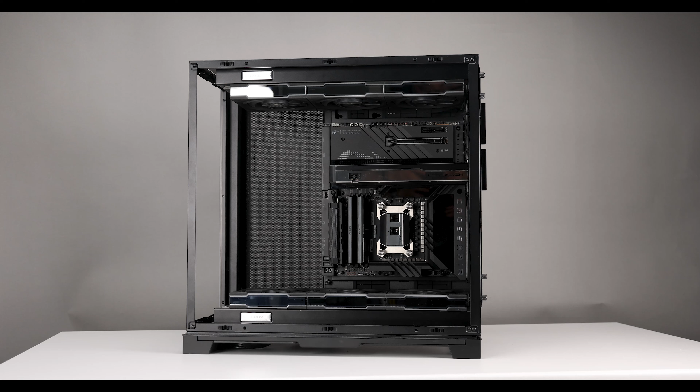Hey everyone, this video is going to be the beginning of this particular build. Instead of showing an end reveal like I normally do, I'm going to do something a little different for this one. I'll break it into parts so we can see it come together.

For those that don't realize, this is a Lian Li Evo XL. That's one of the reasons I chose to do this video with this case, because it's very popular. So we'll go into part selection and some of the constraints I have for this build.

Okay, so first off, this is an AM5 platform. This is the X670E Extreme. I picked this board for this build because I'm going to be upgrading to the 9000 series in about a week or two. I don't know if I'll have the X870E boards in the Extreme format, I don't know when that's coming, I don't even know if it's coming, but I assume it is. So I'm going to use the X670E one in the meantime, and I'm pretty sure it'll be perfectly serviceable anyway.

With that said, I have it in the inverted position, or some people like to say upside down. Outside of that, I have a 4090 Strix on a Heatkiller block, and I've already pre-installed a Heatkiller 420 on top and a Heatkiller 420 on the bottom. I'm using the Lian Li TL LCD fans for the bottom and the regular TL for the top.

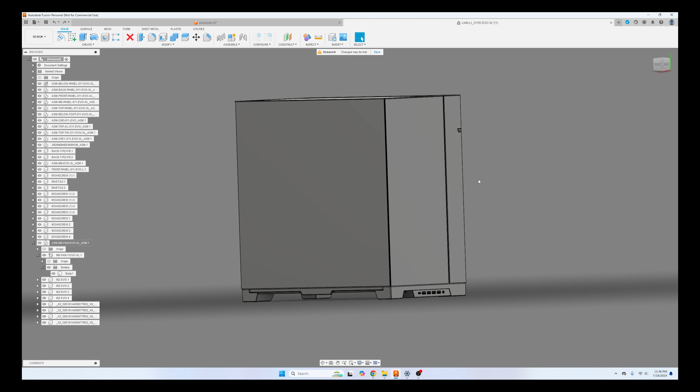Alright guys, so we're on the computer. I have the CAD file for the Evo XL open. This is actually public - you can grab it from the Lian Li Evo website. They have it for some cases, not all. You'll see it in STP format, or sometimes it might be something else.

But it's kind of cool that they offer this without you having to ask for it. Most companies are not going to give it to you unless you're a partner of some kind, or you want to make accessories or something like that. So it's cool that they put it out there. As a consumer, you're not exactly going to be able to produce it on your own anyway. And the factories that make these cases often let these designs go, and that's why you'll see sometimes multiple brands making the same case. It's not because they're rebadging a case - the factory's kind of like, hey, we're making this, do you want to make one too? Whatever, I don't want to go too much into it.

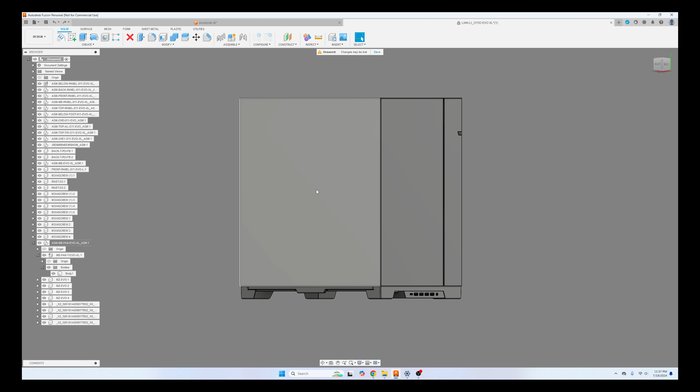So here, I pretty much know I'm looking for this bracket assembly. I mean, you can move all this stuff around. For those that don't know, Fusion is a free program, unless you want to use it for commercial purposes, then you should buy a license. But I just have the free version open up here, and I'm focusing on this bracket because what I was telling you guys earlier is that I'm going to mount my reservoir on this bracket.

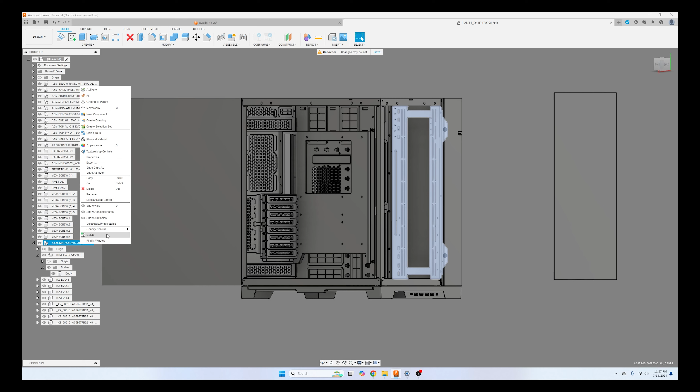So what I'll do is I'll isolate this bracket, and you can see that because I have the CAD, I can easily design something here. I know where all the holes are, and that's essentially what I have over here. So you can just export this bracket into another file and then open it.

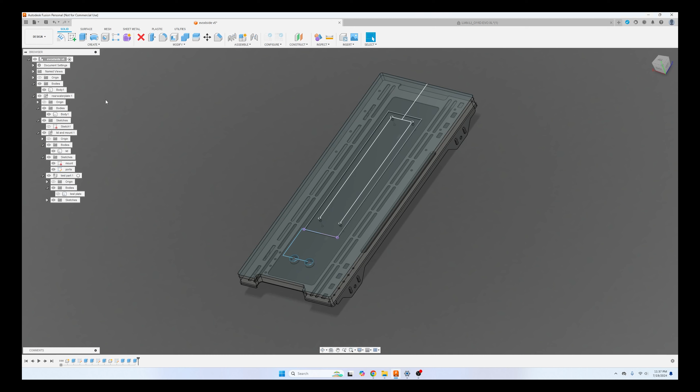So this is the bracket itself. So I've taken the measurements from the bracket and projected it up. You can watch some Fusion guys online. I'm not a professional at this, but I know it well enough to do what I need to do.

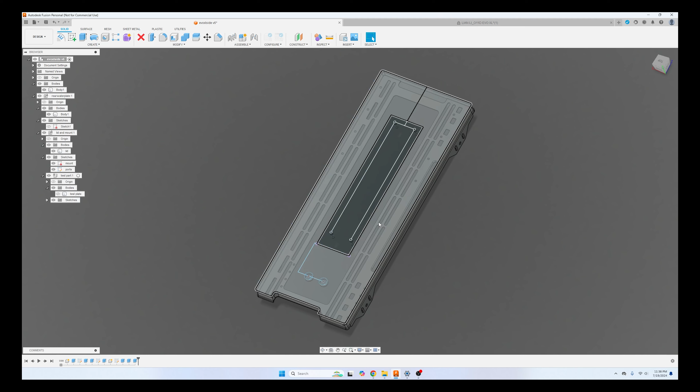So right away, I made a sketch where this is kind of the outline of the Heatkiller reservoir. This is the entire width of it, 70 millimeters. This inside are the mounting holes for the reservoir, which is why there's going to be a hole there.

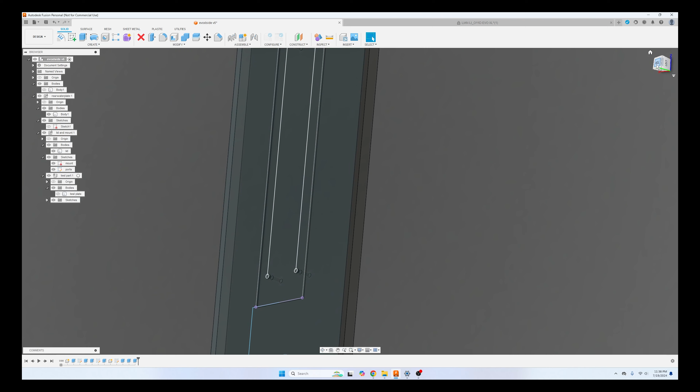So if I hide all this, I'll show you guys this basic sketch, and I put on my test plate. Now that we're looking at the plate, my test plate, I cut these holes myself. I measured them, where their locations would be, and my plan is to mount the Heatkiller reservoir here, and then these ports are going to match the in and out that's on the res itself.

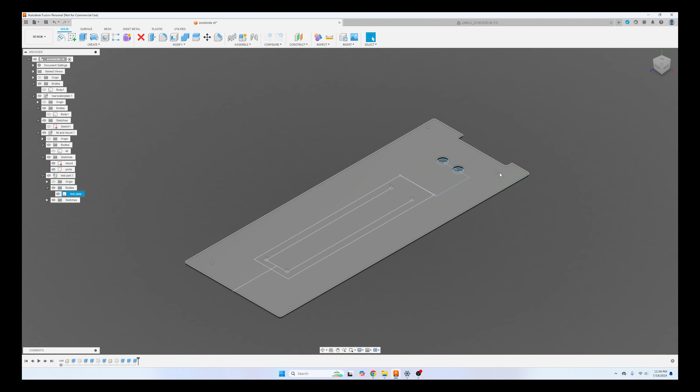I've already cut this out so I can show you guys what I mean. I've chosen these temporary mounting locations for screws to mount to the original plate, to the original body plate. I could use the 360s here and the 420s, but unfortunately I'm going to have some tube runs right here, water channels on this side and this side, so I can't put a screw there.

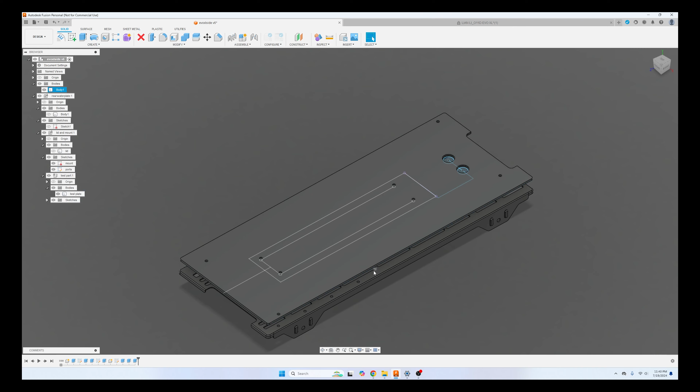I put them on the extreme ends. You're not going to see them from the front because if I put back - sorry guys - this is the bottom of the distro plate, and this is the lid of the distro plate. So the screws will come through from here. You'll see that, it's an example here.

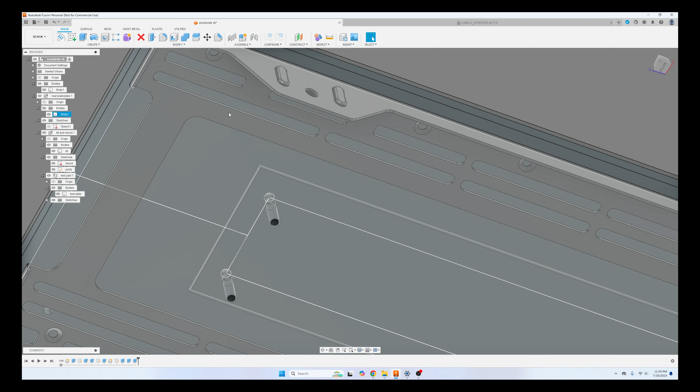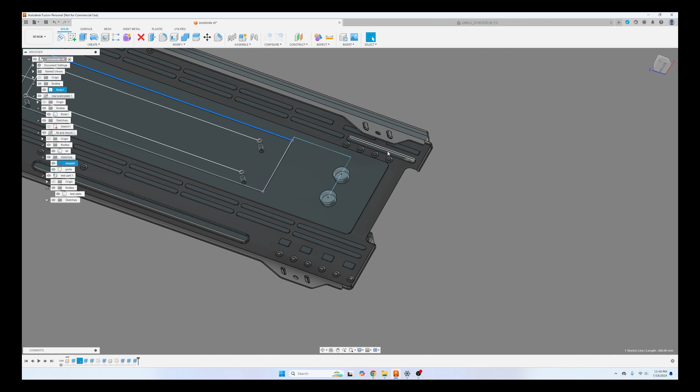Sorry guys, really struggling without my space mouse. It's like from here, for example, I'll put a mounting screw here and make a thread on the rear of the acrylic plate, and that will be a good place to mount the screw. Same goes for here. Well, that's too low, maybe like here. I have a screw here already, so stuff like that. So that will make it mount, and you won't see any of the screws because this will come in.

So what I'll do now is I'll show you guys the plate, I've already cut it out. For those not aware, Fusion is also a CAM software. I know I'm going off on a tangent here, but if I go to manufacture, you can see I've already made the tool paths for this cover plate, and I've cut that out on my CNC.

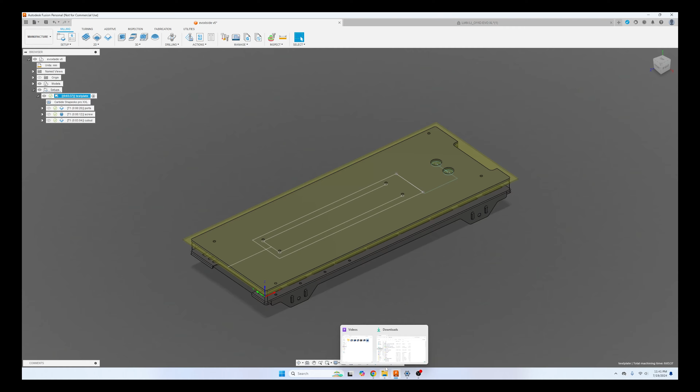So we'll go back to the PC now, and we'll mount it in place, and you can get a better idea what I'm trying to do here. All right, so you can see here I've cut out that plate I was talking about.

This is 3mm acrylic. Obviously, I do not suggest you mount a reservoir on 3mm acrylic. Even though this is backed into that metal piece, I would still not suggest it because it will crack over time, especially when moving it around. It's just not good enough. If you want to use 3mm, use 3mm aluminum.

But anyway, the point being is my Heatkiller reservoir, sorry, pump res, is here now. And what I was trying to tell you guys from the beginning was that this is obviously not the right length, but I plan to, for example, run one here, run one here, and then for the GPU you can see I'm going to do something like that, and then something like that. Obviously, I'm going to have all 4 ports be at the same height, so it's a symmetrical look, right?

So for this portion, the CPU, I'm going to have both of them come out, hit something around here that will then connect these two ports. So that's pretty much the plan. What I'll do now is map out the ports here.

I'll show you guys how I do that, and then I'm going to map out the ports in the front. I think that's really just finding the X here, because the Y is variable. Sorry, no, the Y is not variable, the X is variable. So let's look into this part and get started.

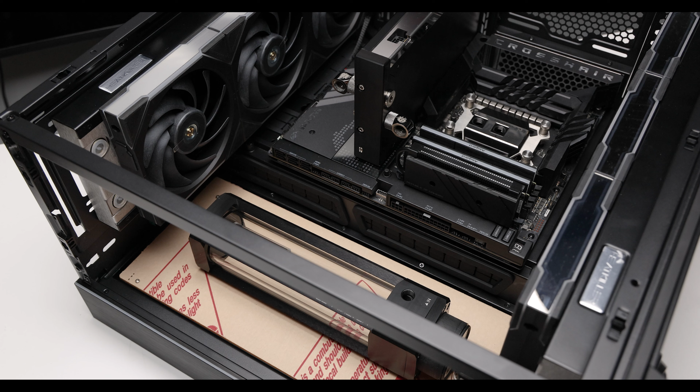Sometimes I like to use metal tubing for this because the 90 is always perfect. So if I use a combination of fittings and tubes to mark this point, that 90 is always going to be perfect, so when I bend the perfect 90, it's going to fit. Or sometimes what I'll do is I even just build the whole fitting bridge. Obviously not everybody has fittings laying around, but I happen to have that.

The plan here, to clarify from before, is that this out, right here on the reservoir, is going to go into this radiator. So there will be a run here. Obviously this is going to be adjustable, this can be lower down, can be higher up.

So when I'm measuring this, I'm only going to have to figure out X for the radiators, the Y can be varying. For the GPU, I can figure out the Y, and the X can be varying, because I can move it a little bit over. Ideally I'm going to make sure these tubes are equidistant from the reservoir, so that way it's symmetrical.

But that aside, we're going to go out into this reservoir here. This reservoir is going to connect with a different block distro thing to this GPU mount, to the CPU. So there will be another thing floating over here, which will be the connection to this. This will come back out, go into the...

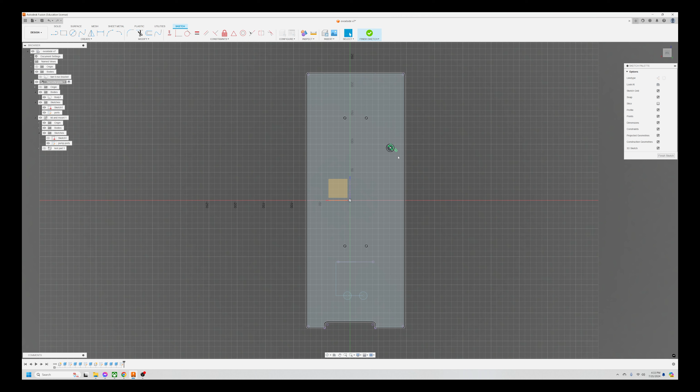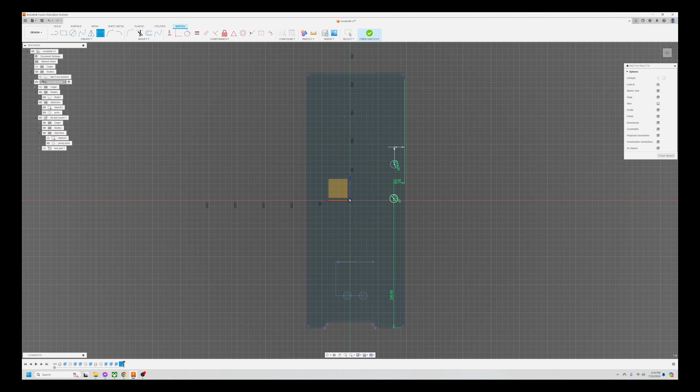Starting off from this perspective, I'm going to draw just one 14mm hole, and we'll say it is, according to my initial measurements, 19mm off to the side, and 230mm from the bottom. And the next hole is going to be 14mm also, 19mm... actually, you know what, let's zoom in here and make this 16.

I should keep it 14. Obviously people do that slightly differently, you don't do it the same way I do. So this distance is 71mm. This is the GPU, right?

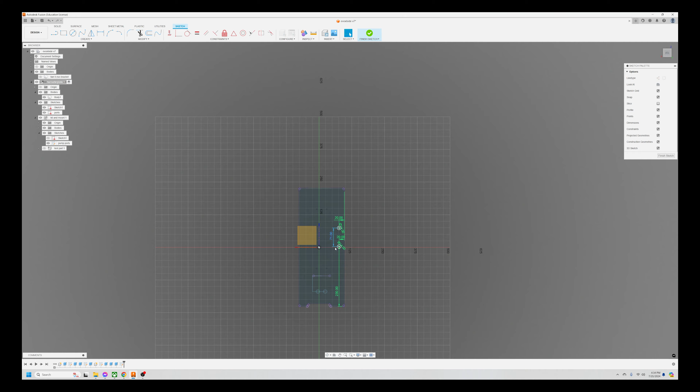Like I said before, I can move the X in, the X out more. So what I'm going to do is make it 20mm, because on the other side I think I'm 20mm out. So I'll make this 20mm from the side. And then these are the two GPUs, and we'll come here and do a radiator.

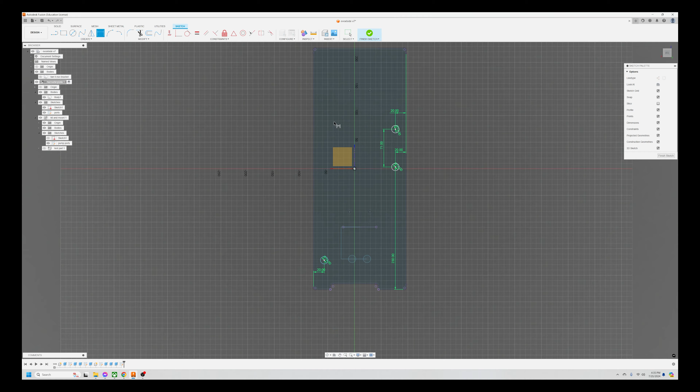I'm obviously going to move this wherever I need it to go. But initially, let's just draw a hole here. We'll do 20mm from this side. And then for Y, we can put it wherever we want. Let's do a measure.

This is how far? This is 230, right? So we'll move this 230. Come in here, so we'll also say that this is 230.

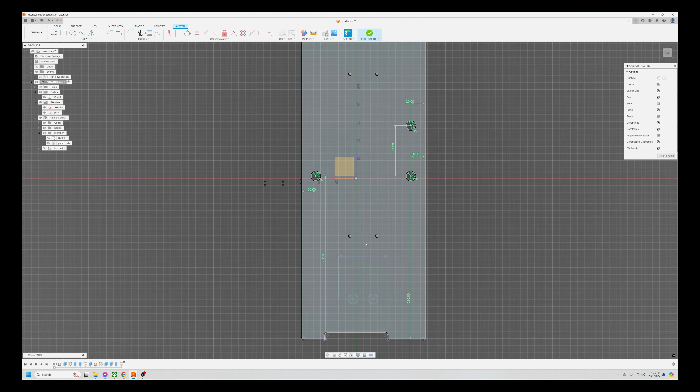So now you'll see I don't have a model of the reservoir, but the reservoir is going to go here. It's 70mm, this is the amount. I think I have that over here, right? Let me project that into here if I can. So this is a 70mm line, and then we'll do another 70. Yeah, that's 70mm. So that's the res.

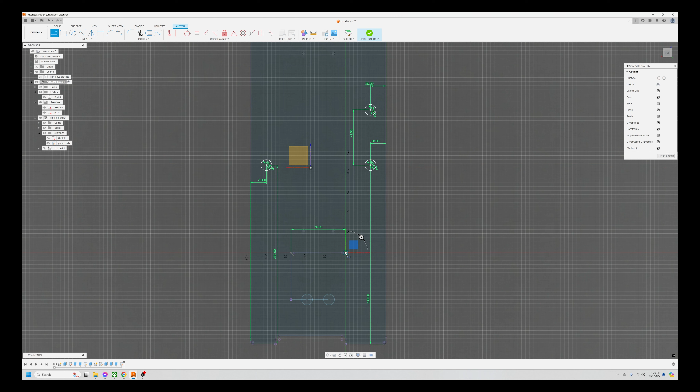So if I look at it - like I said guys, everyone has a different process, mine is not exactly the only way to do it. I just want to see here. We have from the width of the res, what is that going to be?

Why is that bugging out so much? Because it went to the other. Hold on, let me see here. That's strange, it's been a while. Let's see, what's the distance between? Why won't it let me measure the distance? Oh, because that's not a line.

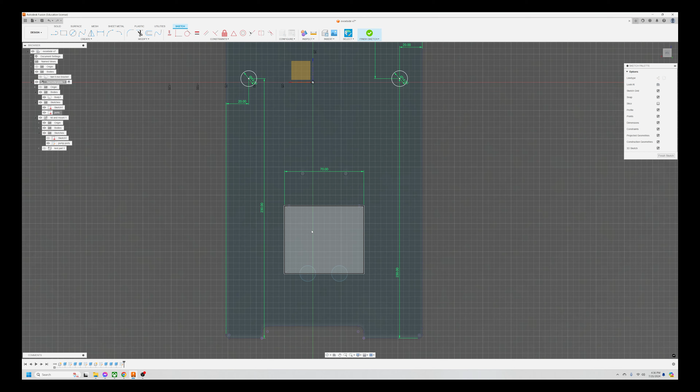Duh. Alright, so let's draw a line down. Just want to see here, what's the distance between this edges? So it's 32, approximately 32. We'll draw another line, and that's 31. So I guess we can move this over 20.5, right?

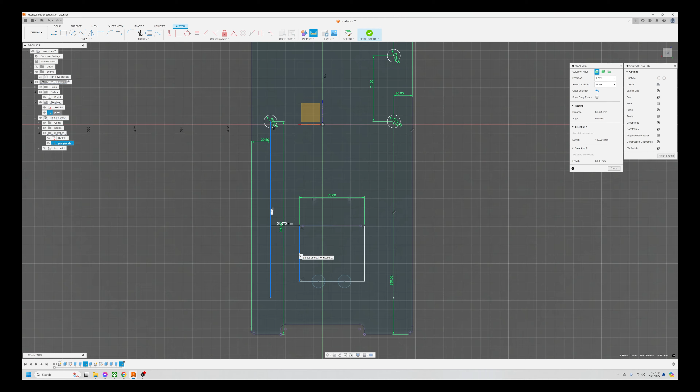And then we have 30, 31, we can move it over. You know what, let's just make it 21.5. And then we'll come down here, take another look. It's 36.92 - yeah, you can see I can get very OCD about this. No, that's 31, 30.2. Alright, so let's just make it 21.

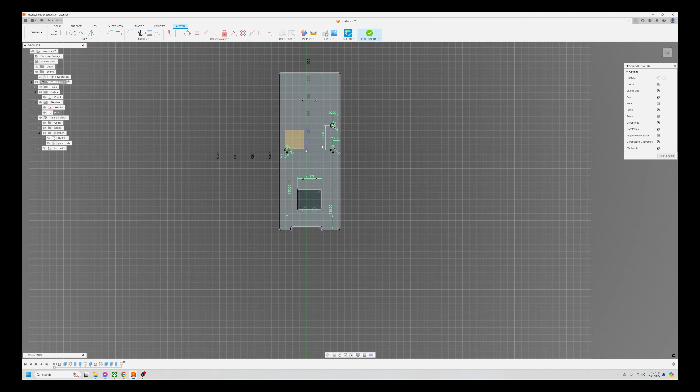To the naked eye, it's going to look about the same. So essentially this port here and this port here, when I have the whole reservoir in, it's going to be exactly the same - it's going to look the same distance away.

And then I'll just copy this onto this side. Because I can adjust the radiators, I can make these ports however I want them. I don't need to really worry about that, because I can slide the radiator left or right on the case, and up-down is just the length of the tube.

So that's simple enough. Now you can see I have 2 runs coming here, 2 runs coming here, and 2 runs down here. So now what I'm going to do is work out how I'm going to run this one to here. And in my mind, I'm running this to - okay, I have to remember the loop order in my head.

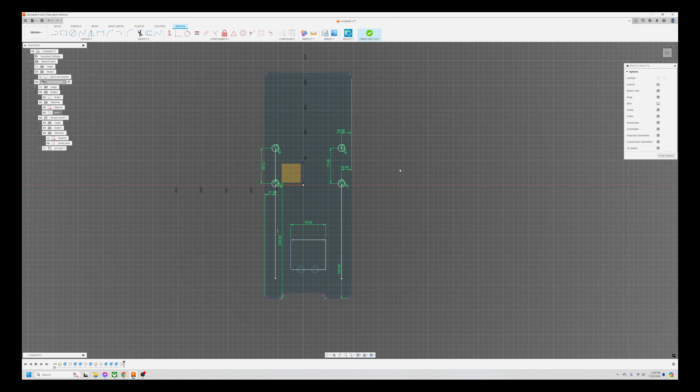But let me just create the channels for a second. Let me think about this real quick. I have to go look at the case again, because I kind of forgot what I was doing. So I was continuing this from yesterday. Okay, so new sketch - let me label it so I know what it is later.

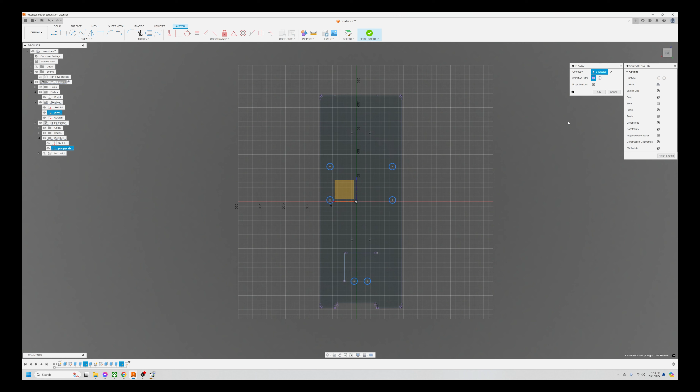I'll just project the ports up. This is simply referring to a previous underlying drawing. I'm not, like I said before, the best person in Fusion, so I don't want to make a guide. So let's just do a simple run of a 90 for now. We can always adjust this later.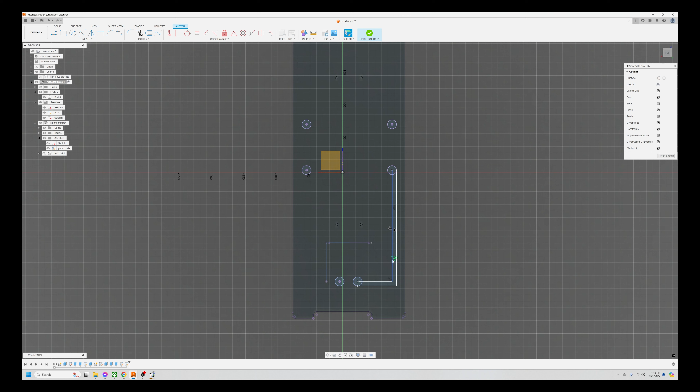So this port's coming here. Let me delete that. So, offset. Alright, I will add the curve to this later. And then let's see, this one has to go...

Obviously this one has to go here. We can almost mirror that. I'm betting I can mirror this. That's hard, do it the hard way. So I'm thinking I could just mirror this side, but then I realize it's a little bit off.

So we will just remove this. Offset. And I just want to see how far off I am from the edge.

14 millimeters, that's enough. So what I'm calculating right now is how far this screw is going to be. I'm going to have 2 millimeters of blank space, and then 2 millimeters for the O-ring, so that's 4 millimeters. Then the screws will come in at about another 5 millimeters, so I'm looking at 9 millimeters. I still have 5 millimeters to the edge from where the center of my screw is going to be. That's essentially what that is looking at.

And this will just come all the way around, so it's going to look like a square. Oh boy, alright, so we'll see if we can make that look better later.

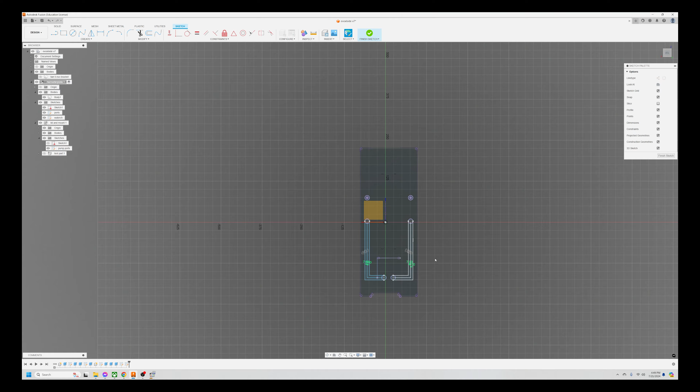Let's try to see if we can mirror this. How long is this line? This is, what was that, 172.65? Alright, so I don't know if this will go all the way. Let's see, oh yeah, that's not going to make it. So we'll just do, you know what, let's just do 120.

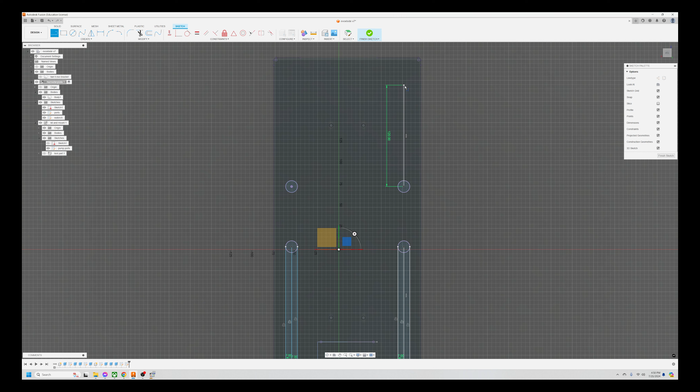You're not going to be able to see it, it's going to be at the top anyway, so let's just bring this up. I think that's a little taller than 120, but it's okay, we'll just trim it out.

Alright, and here we go, we'll do 7, and then we'll do 7 again. Alright, so let's do a quick save.

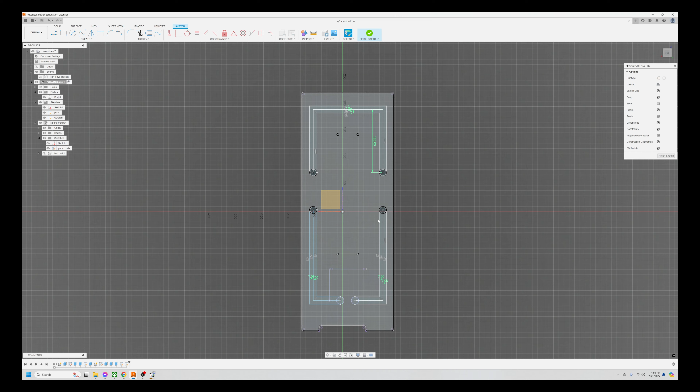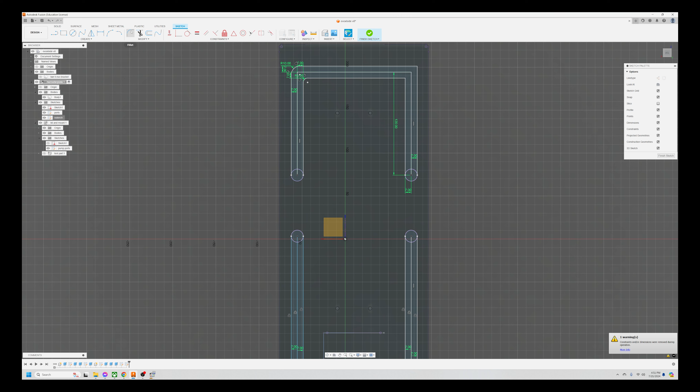Now let's see if we can make this prettier looking. Okay, let's clean up these lines a little bit. I'm going to come here, we'll do a fillet for these. 10 should be enough, and then we'll do a 5. You don't want these super angular lines, because when you go make the O-ring, it's going to be a total pain in the ass. So you want to add a slight curve to it. 10 is usually enough, do a 5 just to make it simple, and then we'll do the same for down here.

This is obviously very simple looking, considering it's not the highlight, and I kind of want it to just highlight that reservoir in there. I think this will do the job.

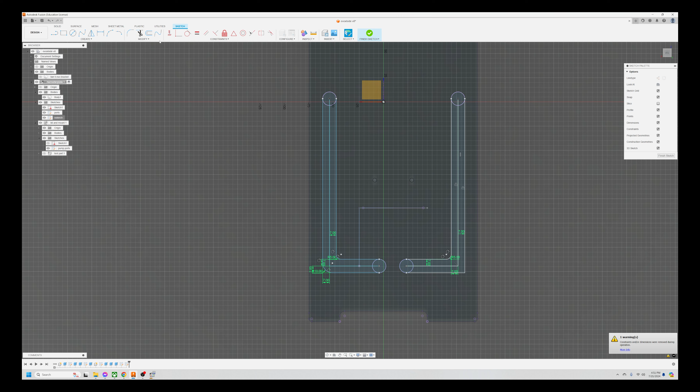These corners can be tighter, like if I did maybe a 5 and a 10, let's see how that looks. So if I did 5 and a 10, does that look better? Oh, I did 5 and a 10, let's see, that did something. Alright, let's see, oh you know what, I'm okay with that. Alright, so we'll say okay to that.

Then I'll just come in here. Is this my bottom piece? Yes. So we will now just, if it wants to participate. Let's see, sometimes it doesn't like to participate.

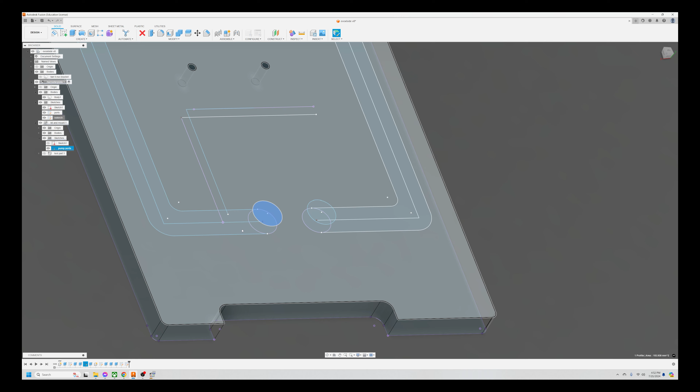This thing of Fusion, sometimes you've got to zoom in, otherwise you end up clicking the wrong thing, like that. Yeah, this is the one thing I don't like sometimes. If I have to hide a sketch, let's hide the sketch, yeah, it makes it easier.

Okay, is it on the bottom? No, okay. So rather than making it all one extrude operation, I'll just make it two. So I like to do...

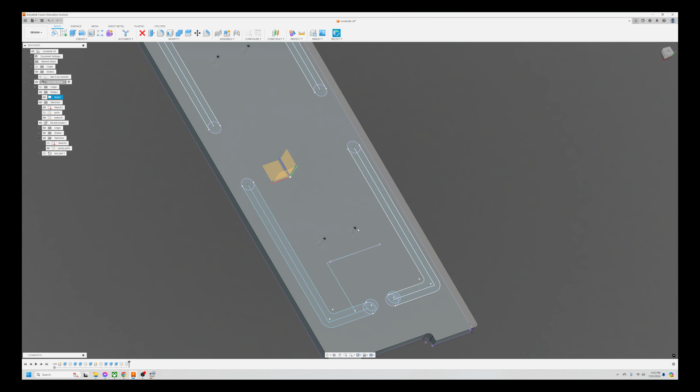7mm. Wait, hold on, why is it still? Yeah, see, that's why you should actually just hide the sketches you're not working on, because then it becomes a total pain in the butt. So yeah, okay, that makes it easier. You notice as I hide sketches, it makes it easier to select what I actually want. Otherwise, it kind of plays this guessing game.

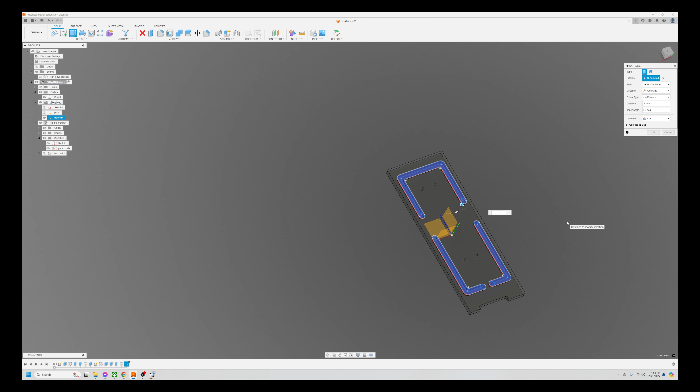So what I'll do is, I think there's a faster way of selecting all that, but I'll just do 7mm. I usually do 8, and depending on if it's a reservoir, I won't do that many because it will actually blow out. But 8 should be okay. I mean, 7 will be too. And you can kind of see that's my bottom, right?

So now I'm going to bring the lid out, which is somewhere here. There's the lid. Okay, so I'm going to do another sketch. Wait, let me make sure my lid mount is highlighted. And I will just put it on top of the lid here. Okay, so we will call this G1/4 ports.

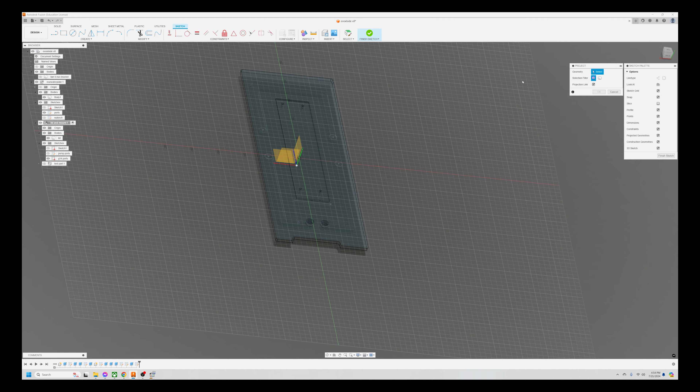Let's see, there's my ports. Is that visible? Okay, so now we will project, and we will project where those ports are. You guys can kind of see how this is working, like very quickly, I think these are already there. Right? Okay, so first thing we'll do is we'll just extrude these down.

You might notice there's a blank space here. That's okay, because it's not going to be blank - it's going to be slightly extruded. We'll just do 6mm because that's the depth of material. I think I extruded this a little bit - what is this? Let's see, 2mm. Yes, just enough for it to sit in a little bit, so it's not sticking out.

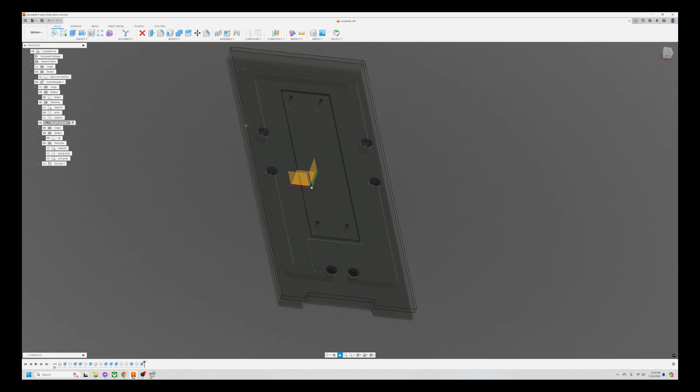And then we'll just come here, create thread. Where's my thread? It's amazing, I didn't use Fusion for like 2-3 months, and I'm forgetting where things are. Okay, so 1... no, let me select more faces. Select the faces first. 2, 3, 4.

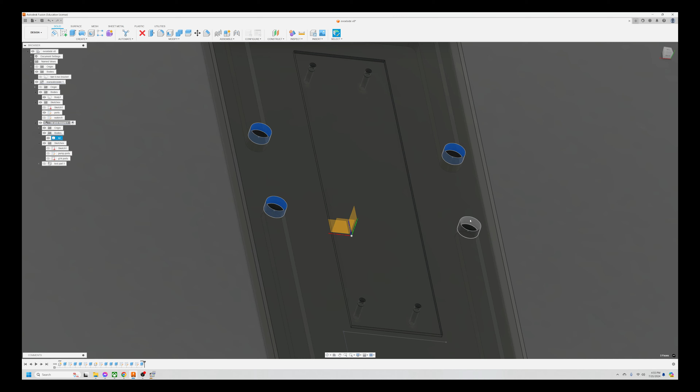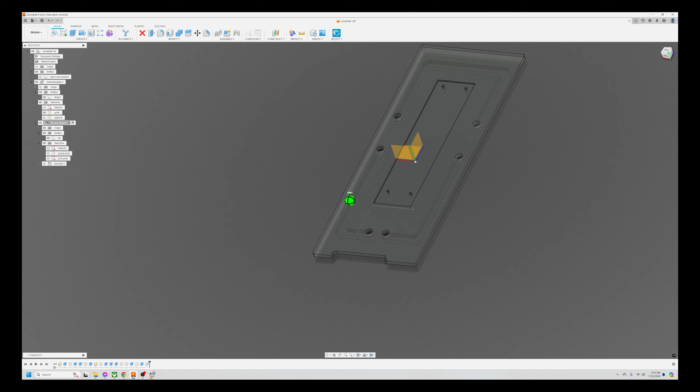Come, create thread. I really should do my shortcuts on this one, I didn't do the shortcuts on this machine. So BSP pipe thread G1/4. Okay, so there we go. That is generally, you can tell right there, there are the runs.

But for me, this bottom piece is going to be - where's my, alright, so this bottom piece, did I label this? No, so I'll call that the plate.

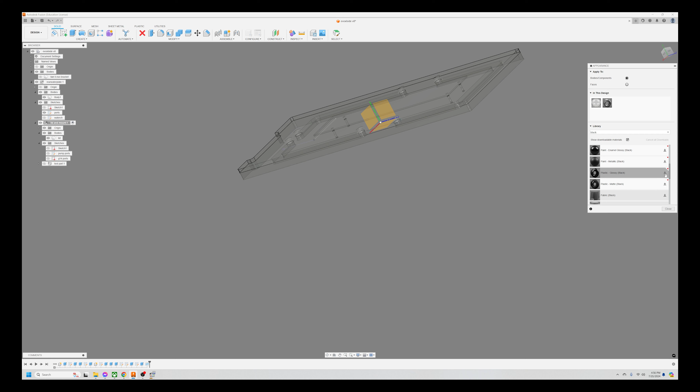This is going to be black acrylic, if I can get that to show up. Okay, well, it's going to be glossy, kind of, but not that glossy. So it's black plastic glossy, so let's just apply that. You'll notice I didn't even download all the appearances. So we'll just put it on the bottom here. So that's black gloss, that's black.

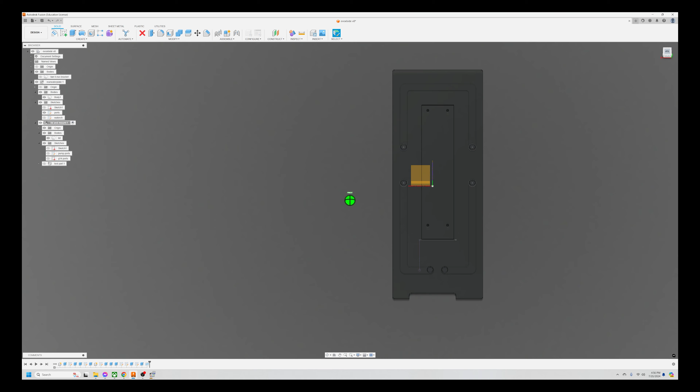And the top will be kind of a gray tint, so is there transparent? Anyway, I'll leave it clear for now so I can get a better idea. So here we go, I mean, this is pretty much - oh, duh, there's things I forgot. Alright guys, so one more thing - we're going to do the screws. I totally forgot about that, I got distracted by the lid.

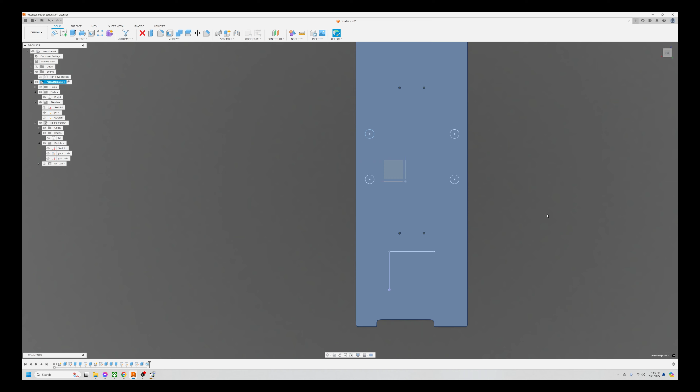Alright, so coming back to - where's my plate? Okay, so coming back to the plate, that's why I kind of like it, keep it - that's why you should always remove... yes, that's why you should always keep it clear to the end, it's easier to see. So there's my plate, I'm going to do...

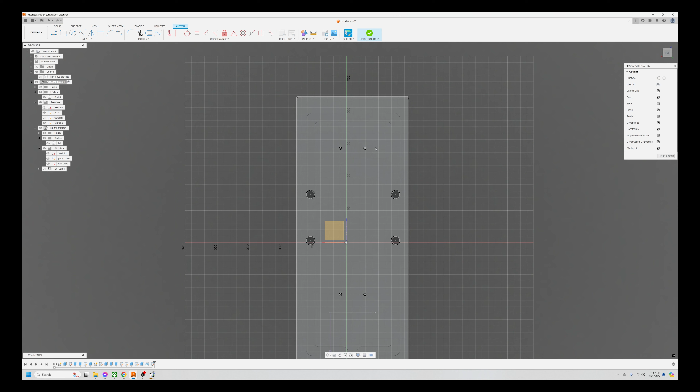Here, new sketch on the plate itself, making sure it's in the right part. I'm going to make sure the water channels are available. I'm going to highlight this whole thing, this thing, and this thing. And then what I'm doing now is I'm making the O-ring.

So I'll do a 2mm offset. And then I'll offset it again by 4mm. I'll do the same for these guys, 2mm offset.

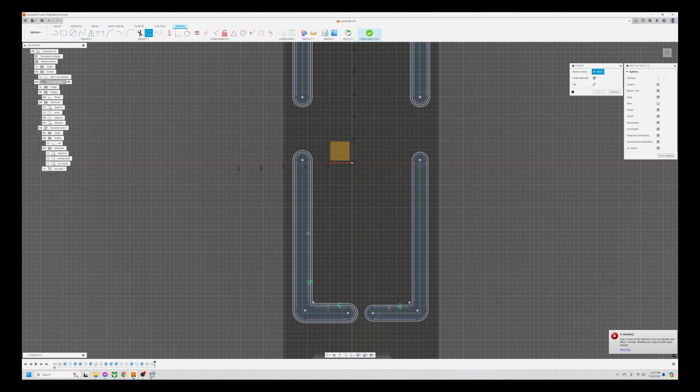And then another one for this one. You can't offset off something that's already offset, so that's why I'm not doing it off the other one. See, because if I try to offset off this, you can see that it shows one or more selected areas has been offset, right? So, because it's basing off this, I'll just do 4mm. So essentially what I've done is I've created a 2mm gap, right?

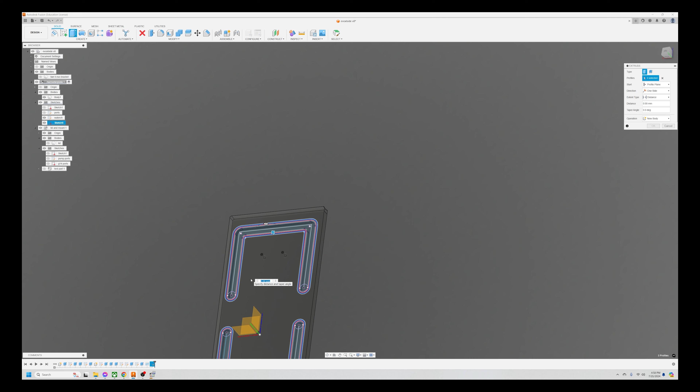And then I'll take this part - this is where the O-ring's going to go. Come on, highlight, highlight, highlight. Okay, so I'm just gonna do 0.5. There's a reason it's 0.5 - it's not because the O-ring's... it's 1mm, it's a 2mm O-ring.

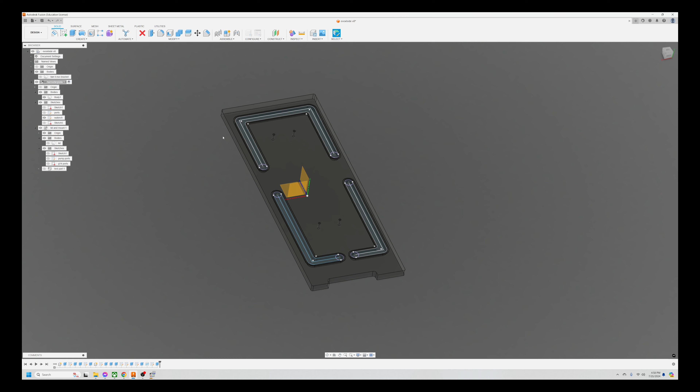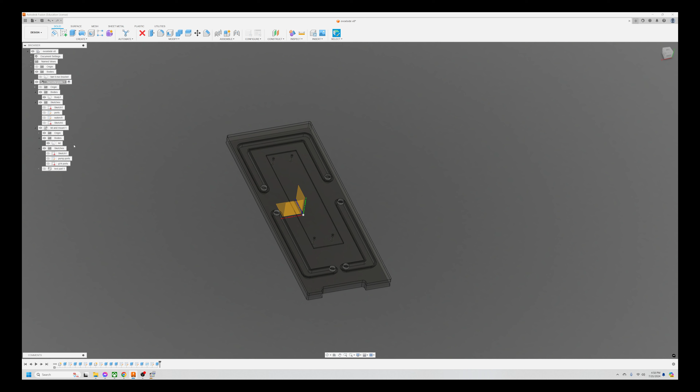And that's my O-ring. So now I'm gonna work on the lid, bring the lid back, or hide these sketches I don't need to see. Now I'm gonna make the screws. Let's see, make sure I'm in the right part.

Okay, so I will do new sketch. I will project where the end of the O-ring is. So let me label this before I forget - I can't label it right now. So this sometimes doesn't come up as nice as I expect, but we will just come in here and get the edge.

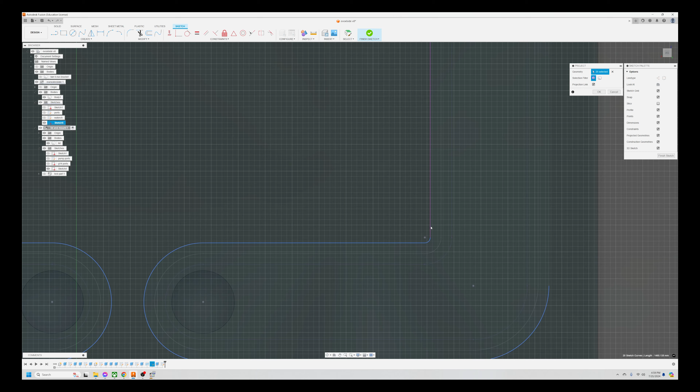So yeah, unfortunately it doesn't always highlight the entire thing, and I don't want to over project things, so I don't want to click everything all at once. There's a lot of shortcuts in Fusion. I've yet to learn them all, but one day I will. I've been slowly practicing drawing more complex items, simply because I might not be able to machine those things, but I can definitely print them, and that brings more possibilities.

So okay, here we go. Now I have the projected O-ring. So what I'll do now is an offset, and this offset will be 4.5. Some people like to go a little further, but I think for me, if I go further, my screw's gonna fall off. So I'll do 4.5, and now it's about the matter of picking the perfect screw situation.

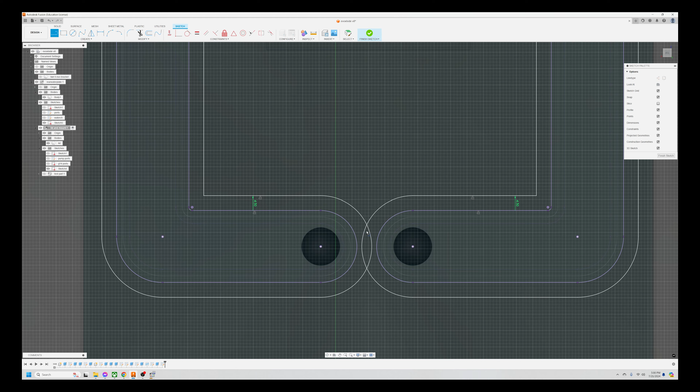Some screws I'm gonna have to put in myself, like this one right here. I can just tell I'm not gonna be able to follow a path, so I'm marking that ahead of time. This one I will call screw path. I'll do a quick save.

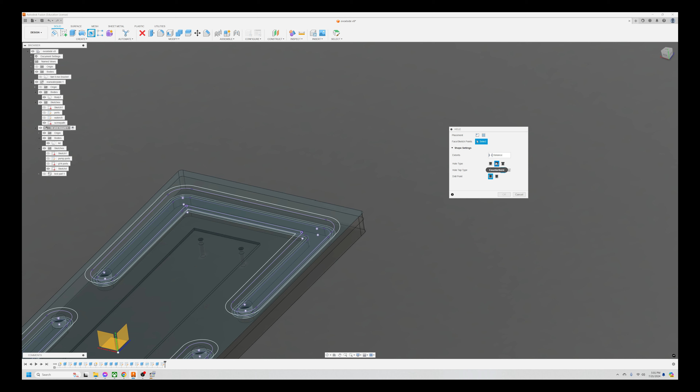Alright, so now it's time to add the screws. I come here and I'll do create hole, and just let me select here. I'm going to use it tapped. It's going to be flat at the bottom. Is that threaded? Okay.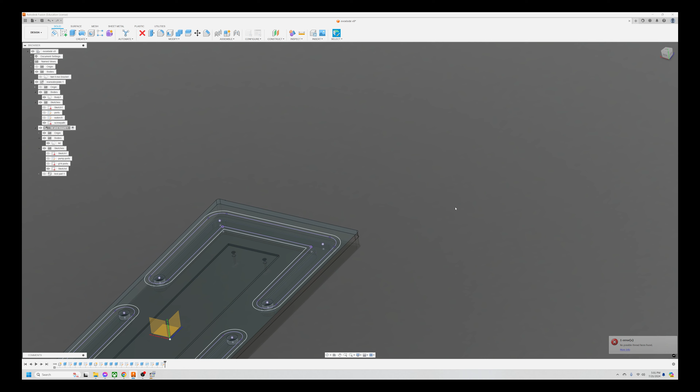Why is it not selecting the point that I like? Okay, so let me hide some of these sketches. Okay, I can't hide. Oh, is that my screw path on top of the lid? Okay, yeah, sometimes you gotta be careful. It's in the wrong sketch dimension, and then it's gonna be all messed up.

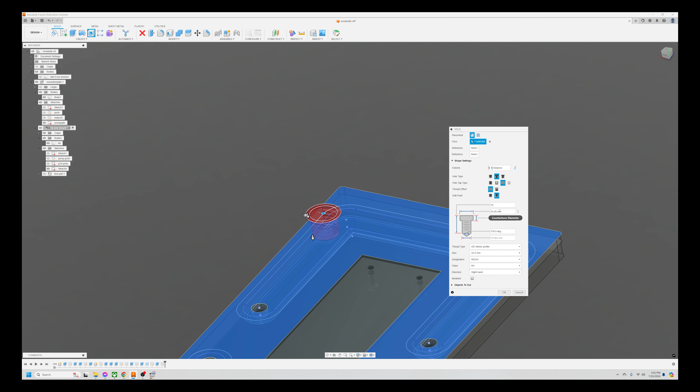Okay, so hole. So I'll put it here. Let's just say we'll start here. And then this will be an M4 screw, so it's gonna be 16 millimeters wide. The head of the screw is 4.6. Obviously, depending on the screw you're using, some of these are gonna change. This will be 6. And it's giving me this error because it's thinking it's the M22. Obviously, we're going to use a 4 millimeter M4, and it's going to be flat at the bottom.

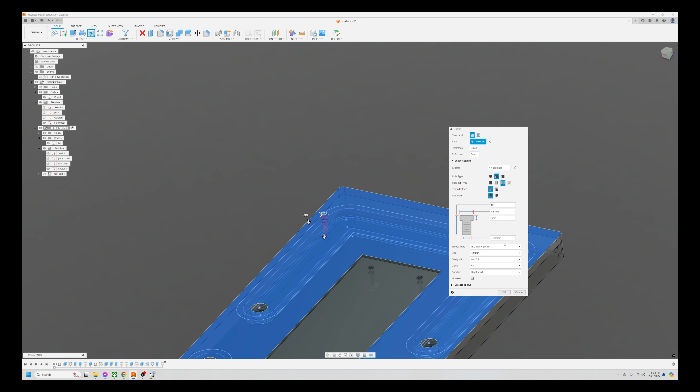And yeah, so that's just one right there. Then we'll come in here and we will do a chamfer because it's a countersunk screw, right? So you can see right away this is by the edge. And that's why if I went even further out, I'm going to have a hole.

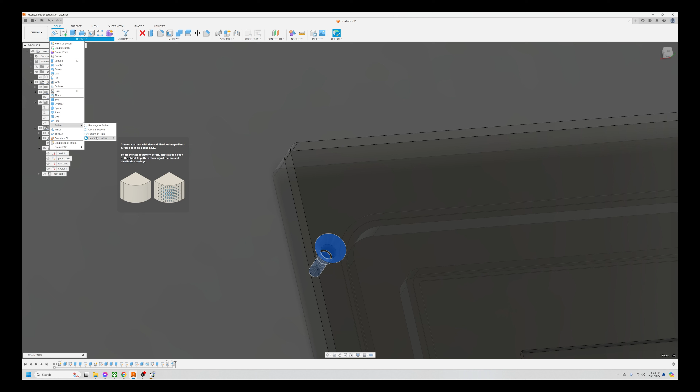So now what I'll do is this is one of the ways, the screw path, I'm at the height. There's another sketch here. Alright, so highlight all the certain features. I'm going to create pattern on path. I'll bring it back up to my screw path. And then I'll say the path is...

Hold on guys, I think I projected my sketch to somewhere else. Oh, my screw path is actually here. Okay, so that's why. Alright, so anyway, I gotta fix the location of that, but it's okay.

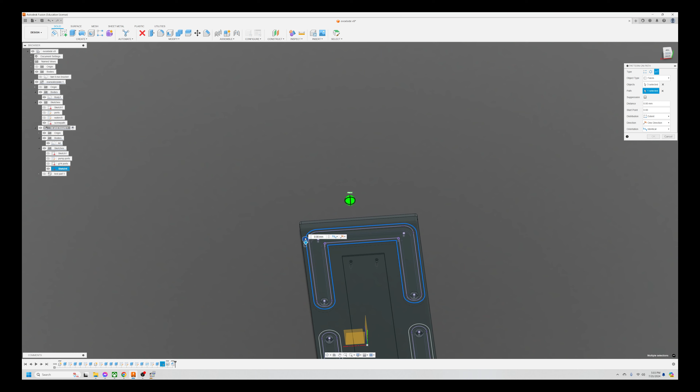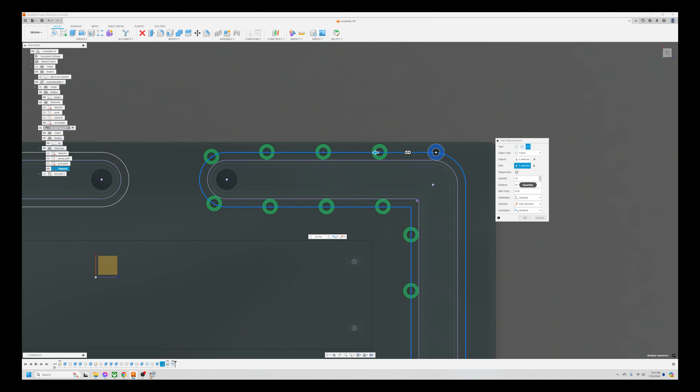So, well, let's use spacing so it's even. Let's just start with 32. This is just a matter of picking how it's gonna look. Obviously I'll adjust them as needed. Let's see, let's come here. Let's keep going, keep going, keep going, all the way around. Obviously you want to get a look that's fairly symmetrical.

So you might have to adjust it. You can move it a little bit. I like to kind of have them... to see, what is that? Can I go a little further?

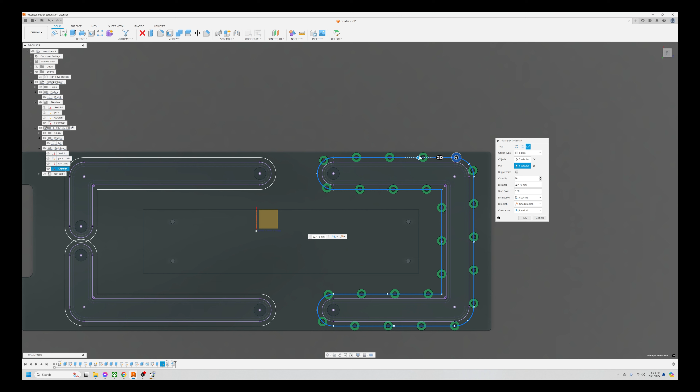Let's say I do 33 millimeters. I mean, I wouldn't go above 35. You'll see some manufacturers like Biscuit put something that's like 40 millimeters apart. That's not really my thing, but I think I have most of it covered. You could actually go less than this, obviously, but I think that would do. And that pretty much puts M4 countersunk screws all the way around.

Right, so I'm going to do the same for these two. I'm not going to show you guys the whole slew of the process. I might refine it a little bit afterwards, but I'll pick up when I start doing the actual cutting.